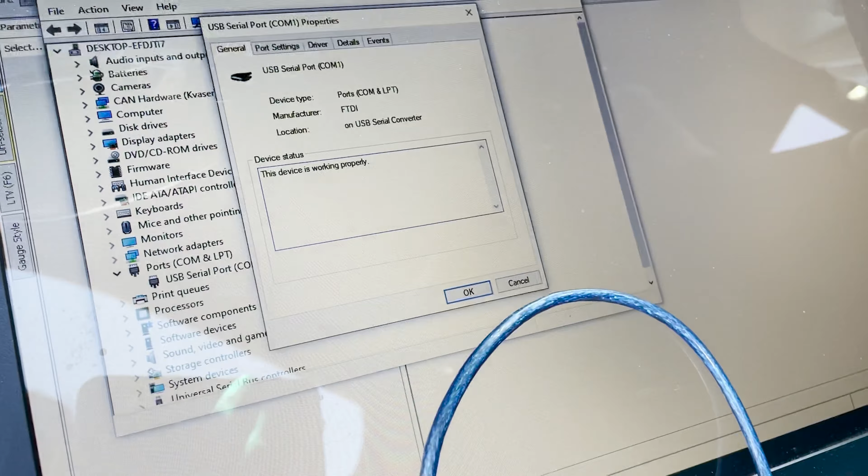First thing we're going to do is just plug the cable into the laptop, and then we're going to open up our RomRaider logger. And if you don't see this COM1 pop up, you're going to have to come into Device Manager. Go to Ports. And see where it says serial port and then the COM number. Just verify. You can come in to Properties, Port Settings, Advanced, and then you can actually change the COM port that's being used.

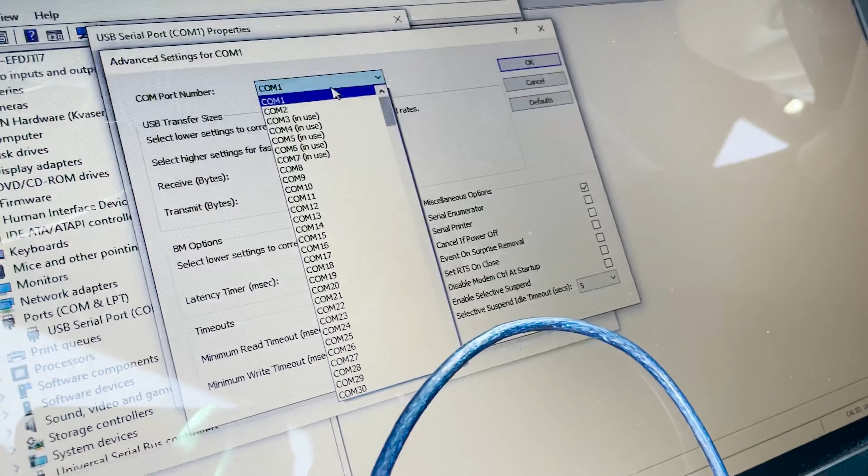So sometimes if you plug in a device and it's sharing the same COM port number, you can actually come in here and change that to a different one. So see on my computer it says in use, so just change it to a different one and then it'll become available in RomRaider.

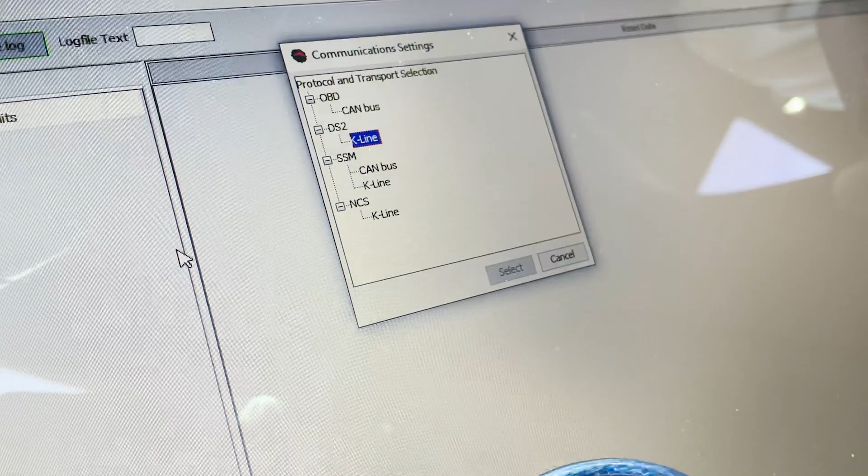Okay, the thing you need to do is come into select logging protocol options, and this you need to change to DS2 K-line. I think when you come in here, the default value is SSM K-line. I think this is for like Subarus or something. OBD won't work. It's going to be your DS2.

The other thing is, if you have a wideband sensor, you can also plug that into your USB and then choose whatever one you have, and you can also log that channel as well. Once that's plugged in, you should be getting a message like this. As soon as you turn the key on though, okay, should be getting the correct values now. So you're going to get a parameter list here, okay?

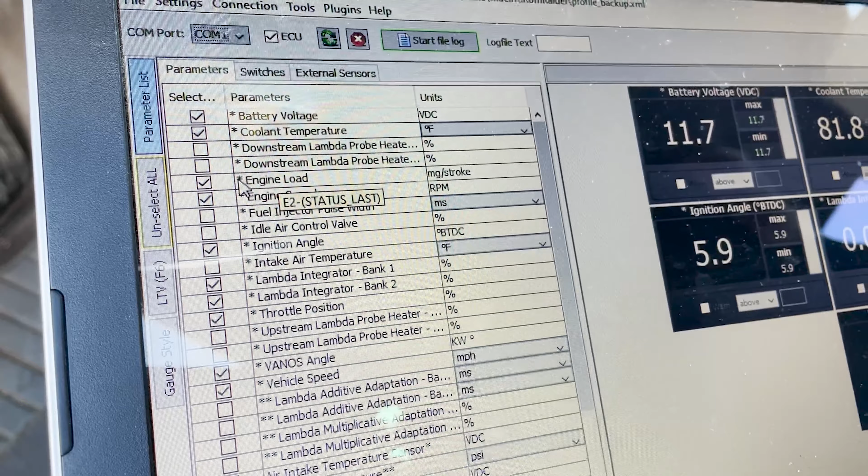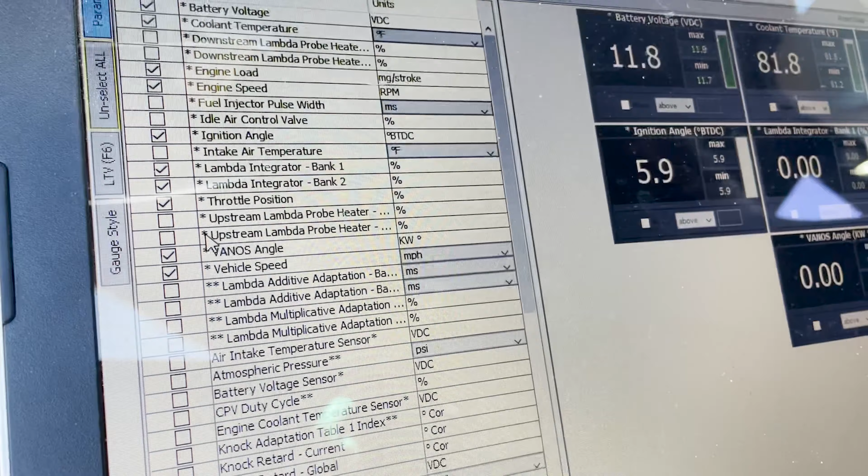So what you want to do is make sure that most of these are fairly important, okay? So all the ones with stars, the star means that it won't slow down your connection if you log these specific parameters. These are considered high-speed parameters by the ECU, so you can choose as many of these as you want. So the one thing I don't have selected here and needs to be turned on is your lambda adaptation.

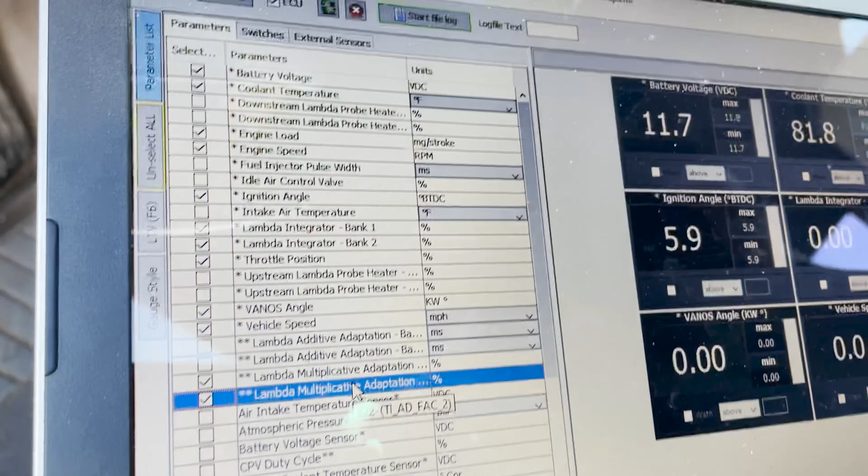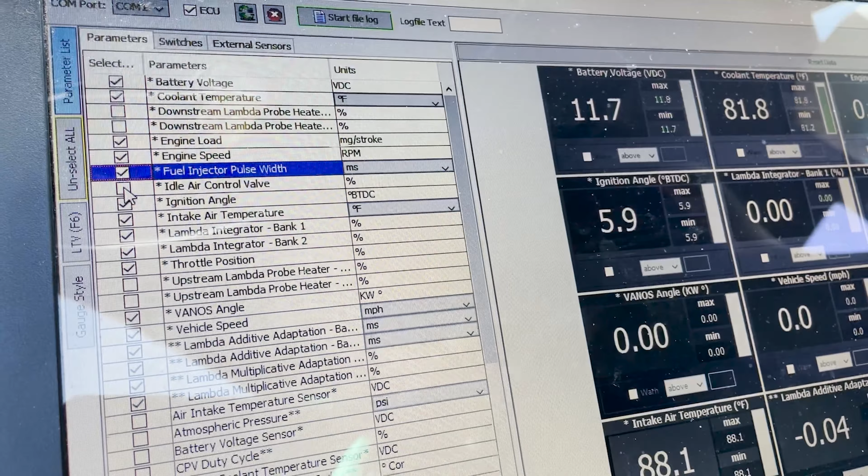So all the ones that I have checked here, and actually intake temp. I'm not sure what these heater values are for. I've never used those. Let's see, additive adaptation you want to turn on. Fuel injector pulse width is pretty important. And then if you need to mess with idle, you're gonna turn on your idle air control percent. So that's pretty much it for that.

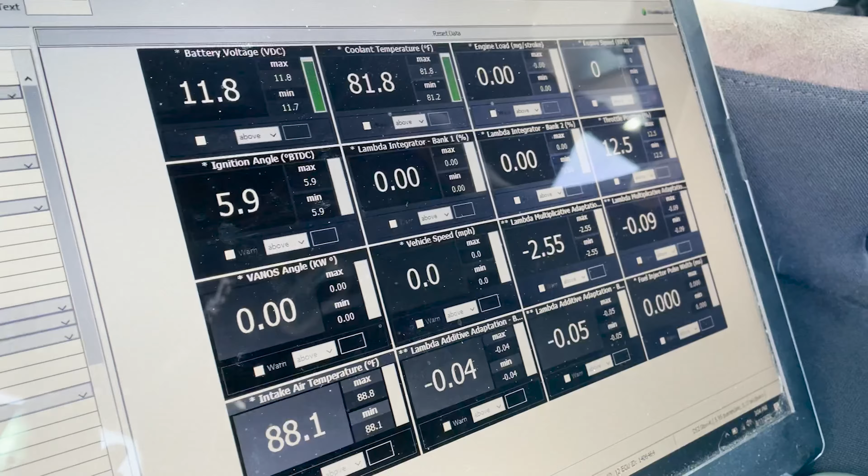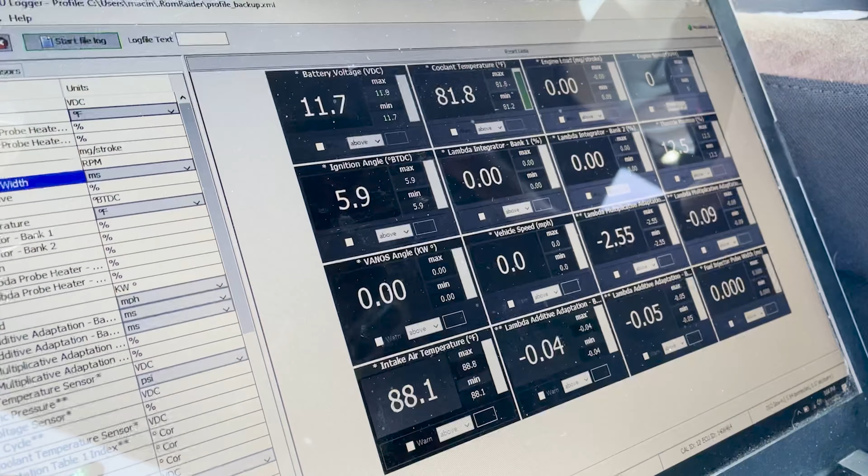We got battery voltage. So you can see here, I have the dashboard pulled up. So you can actually see all the values being logged, which is kind of cool. And especially if you're driving the car and you're logging knock and you want to visually see if you have knock, you can see that here. Okay, so once you start the car and you start driving, you're gonna say start file log, and then you can give it a name. So I'll click this.

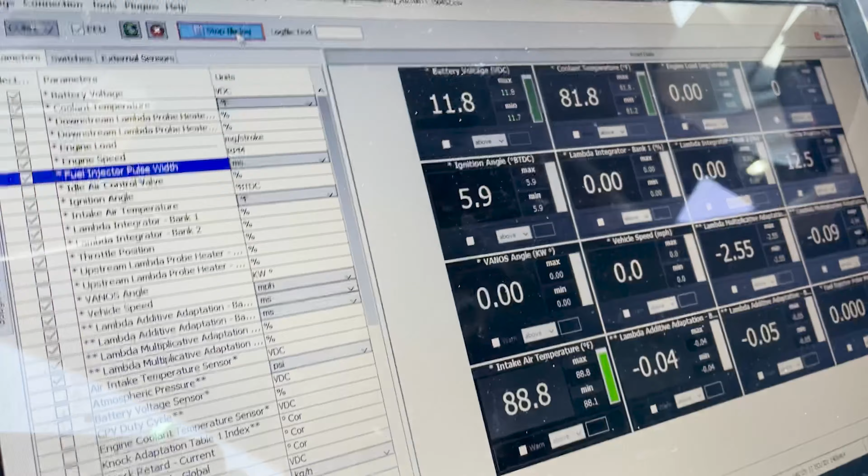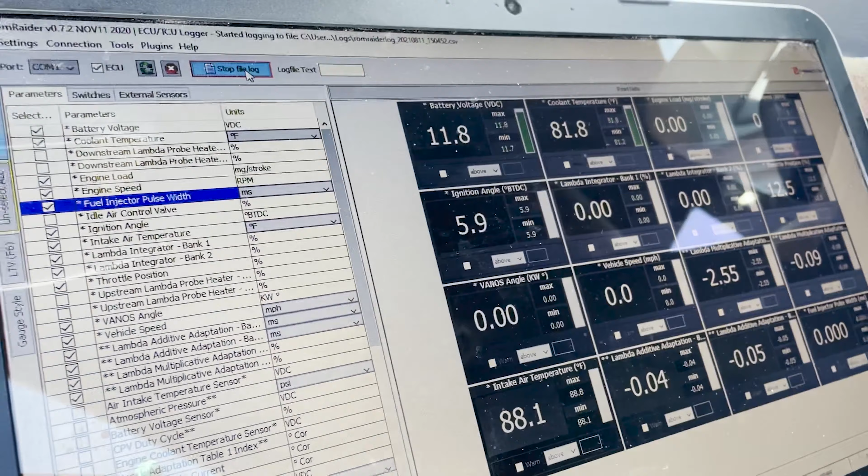Okay, you're gonna drive around. Let's say you need to mess with your idle, so you'd have it idle for a couple minutes, or you'd make some wide open third gear pulls to check fueling, or if you want to tune part throttle fueling or cruising, you would do that. And when you're all done, come in here and click save.

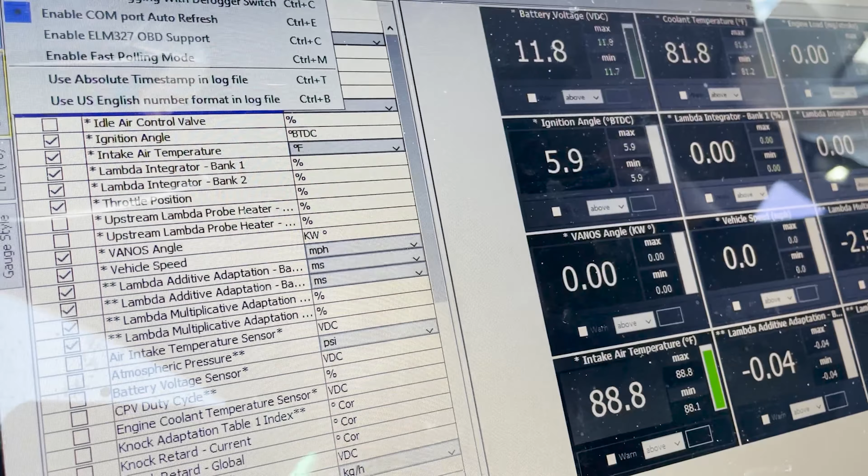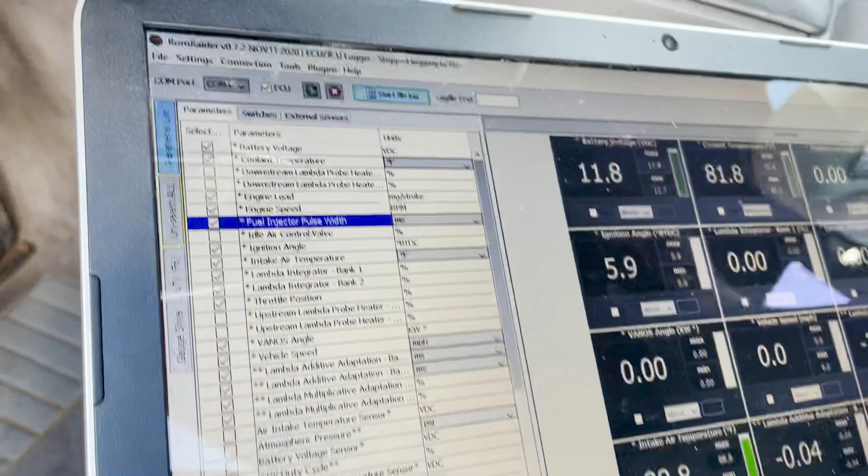Now the place that it's gonna save it is gonna be your, if you come in here, log file output location. So wherever you have that listed, it's gonna automatically save all your logs into that folder. The one thing to keep in mind here, see these tabs at the bottom? So if you're running the dashboard and you have these specific parameters being logged, they're not going to log. This is only for displaying values on the dashboard when you have dashboard selected.

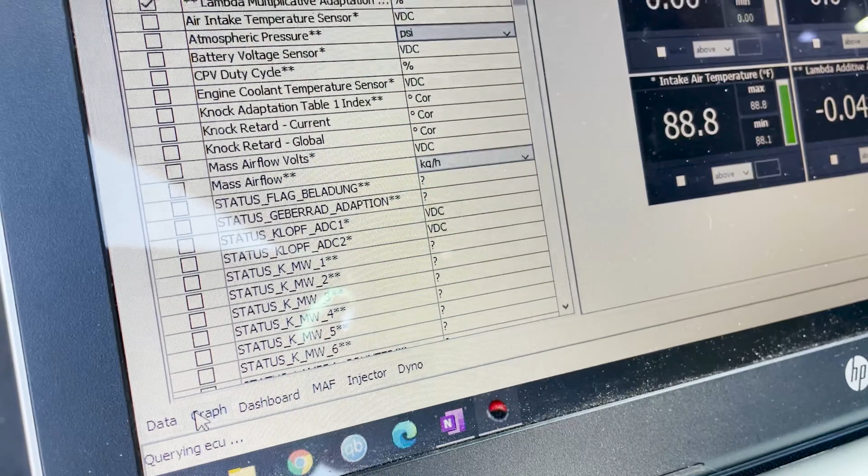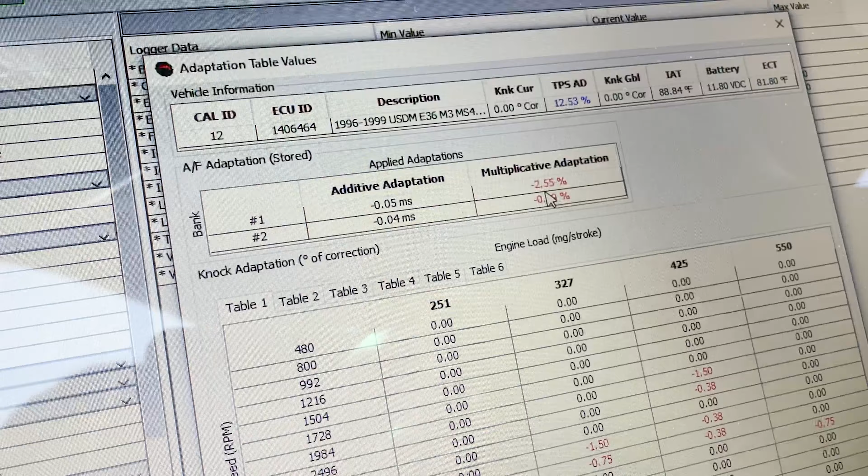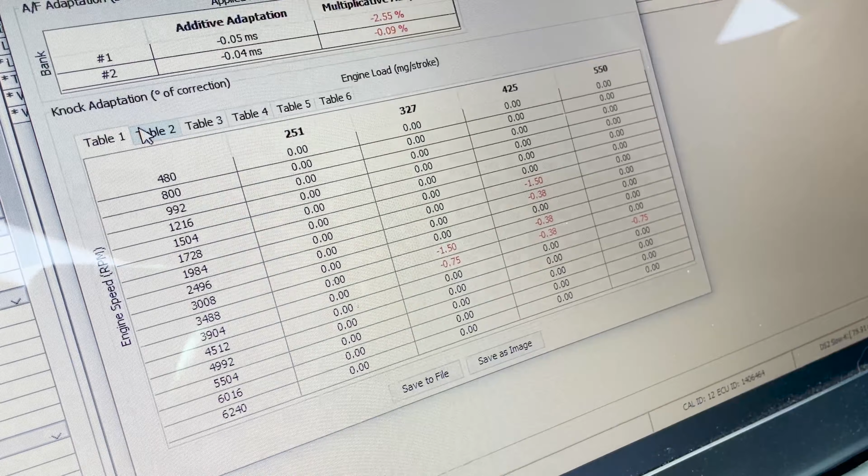This little LTV, you press F6 or click on it, and yes, it's going to interrupt the logging. But this is going to pull up your adaptation tables, okay? So you can see here that my car over time has corrected 2% fuel, taken away 2% fuel. And then here you have your knock tables. So you have load at the top, like I was talking about, versus RPM.

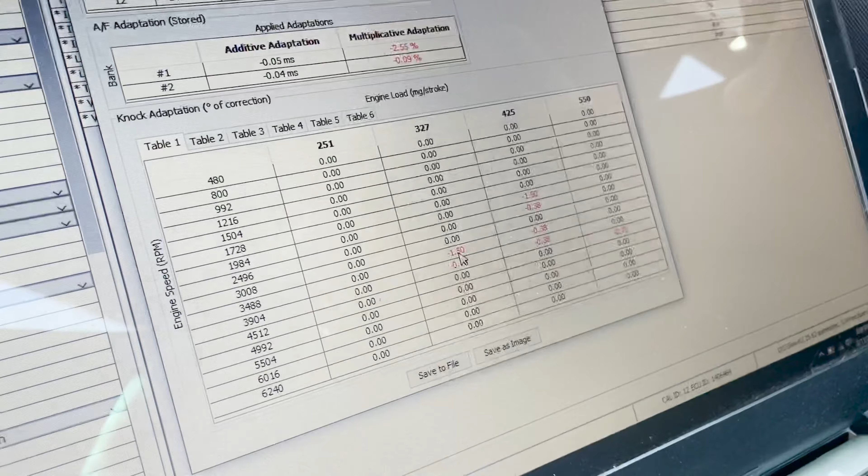And this is not gonna be a tutorial on if you change injectors, how to scale injectors. This is gonna be for basically stock injectors. If you make any changes to any way that airflow is coming in, or change of essentially engine efficiency, I guess you could say. This is almost like a VE table if you come from other platforms, essentially a more simplified version. So on the left-hand axis, you have engine RPM, and then this top axis, you have load, okay?

Now load is a calculated figure. So if you look at this here, I'm looking at the MS41 wiki page. Load is essentially a calculation of airflow coming in from the mass airflow sensor divided by engine speed times this number. And this is BMW's arbitrary engine load, okay? So this is saying how much air is coming into the motor times RPM to give you this load value. So we've seen this parameter in the RomRaider logger, and it actually matches up exactly.

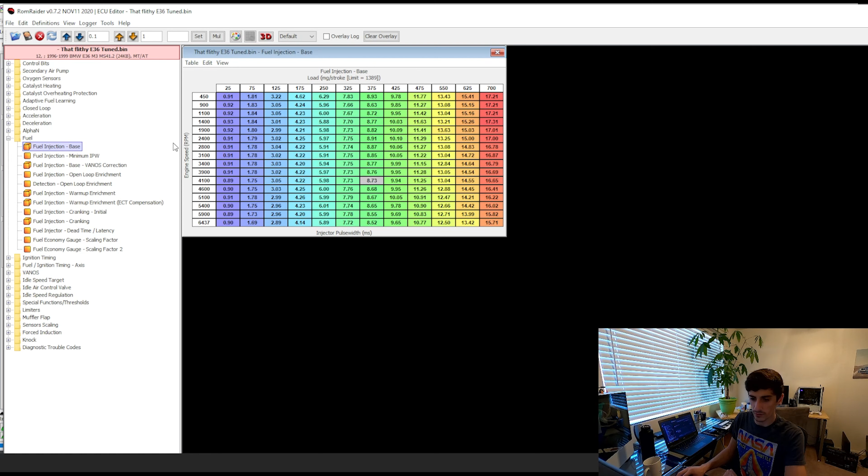So what we've logged, or should have logged, for fueling is going to be your engine load, your engine speed, and then your long-term fuel trim lambda percentages, okay? So just to reiterate, going back to our logs, we want to look at engine speed and load. We also want to take a look at injector pulse width to see if the ECU is commanding the same pulse width that we're seeing in the base map. And then we also want to see the lambda corrections that I've mentioned.

So in MegaLogViewer, I have a quick log of my girlfriend's M3 that just did a quick pull to about, let's see, about 4,000 RPM. So when you open these files up, you can start logging your different parameters here. So again, the ones we want to look at right now are engine load, engine speed, fuel injector pulse width, and then your lambda corrections.

Now, this log is a little bit inaccurate. So again, going back here, we want to actually look at this multiplication lambda, not the integrator. Integrator is your short-term corrections. We want to look at the long-term corrections.

So just ignore this log for now. This should be the multiplication values, but it's the same process, okay? So let's take, for example, this line right here we have in the log. So we have an engine speed of almost 4,000 RPM. We have engine load of 500, okay? And then we're getting an injector pulse width of 8.6 milliseconds.

So if we're going back to our actual table here, it's hitting the cell right about here. And my tune's actually different from the map that's in my girlfriend's car, a little bit different modifications. But essentially my car would be commanding 11 milliseconds and hers was commanding 8 milliseconds. So you can just do an initial check to verify that your ECU is doing what it's supposed to do first.

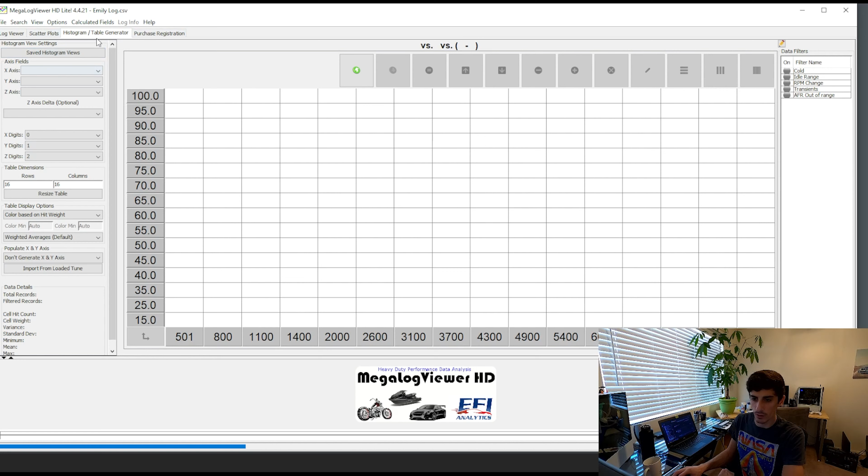I'll show you an even easier and more powerful view you can have in this to just copy and paste your corrections and not have to go cell by cell to figure out where to make these changes. Another powerful feature of MegaLogViewer is this table generator. So actually what we can do is build a like-for-like table in our log, and on your y-axis you're going to have engine RPM, same values. We're going to copy those over. On your x-axis you're going to have your load, and then your z-axis, so the actual values in the table, are going to be your actual lambda % corrections.

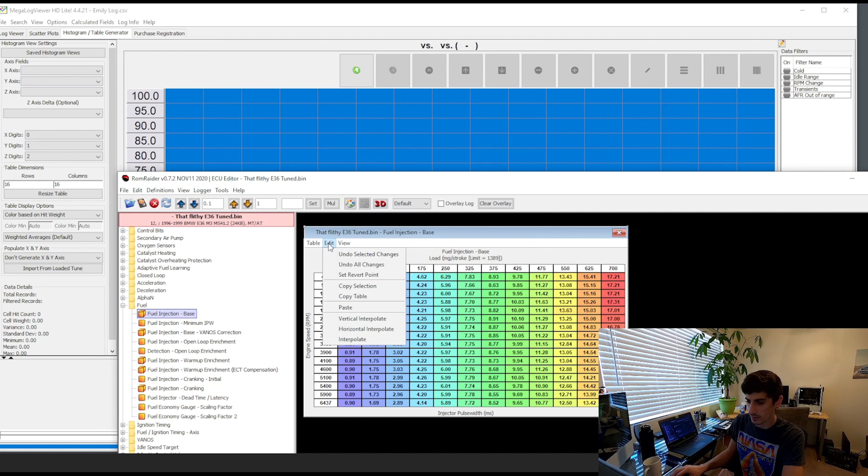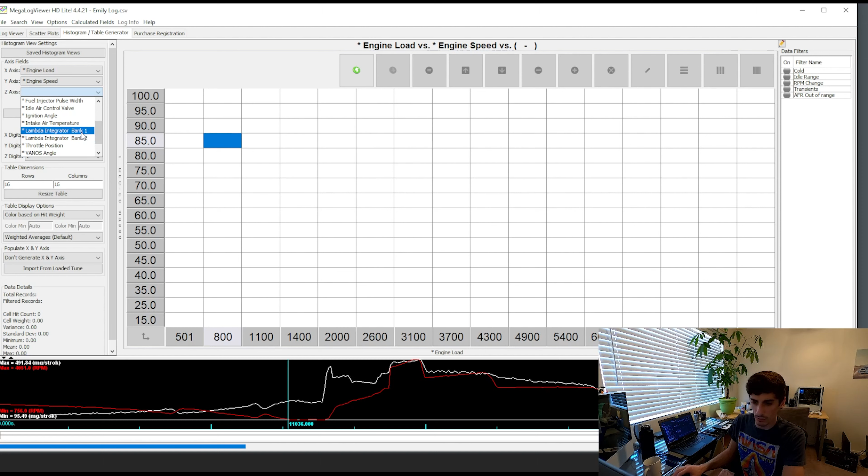So all you would do is basically copy this entire table, come here and then paste. I'm pretty sure there's a way to do paste special and then percentage. I'll have to look into that, but let me just show you this real quick, how to set up the table. Your x-axis is going to be engine load. Your y-axis is going to be engine speed or RPM. And then your z-axis is going to be your lambdas. I'm pretty sure you can log the average of bank 1 and 2. That'll probably be a more accurate number, but I guess we'll just choose bank 1 for now. And then we just have to set up our axis next.

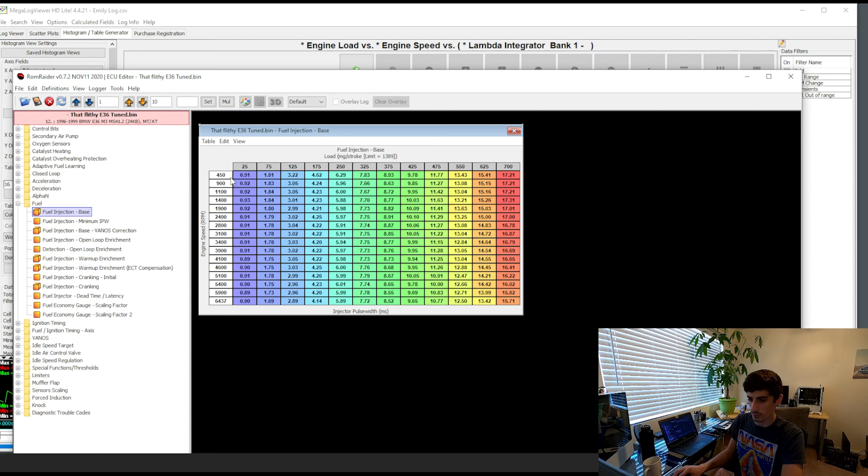Essentially, to set this up, all I did was I reset the rows and columns to match what we have in our fuel table. So 16 rows, 12 columns, exactly how we have it. Then I went ahead and changed all of the row and column axis, and I don't know if there's a way to copy this, but I did have to actually manually type these all in. So if you double click, you can change each value. So now it actually matches 1 for 1 these table column axis. So once you have this all set up, you can actually save this histogram view. So this is only a one-time setup thing.

But essentially what you get once you've logged engine load, engine speed, and your lambda is a correction factor of all of the cells that you've driven in and how much the ECU actually had to correct, minus or plus percentage-wise, to get your fueling to where it needs to be. So this is a very powerful view, and then what you can actually do with this is you can copy this whole axis over to this table, paste it in by a multiplication value, and actually correct your fuel table just based on your narrowband sensors, which is pretty cool.

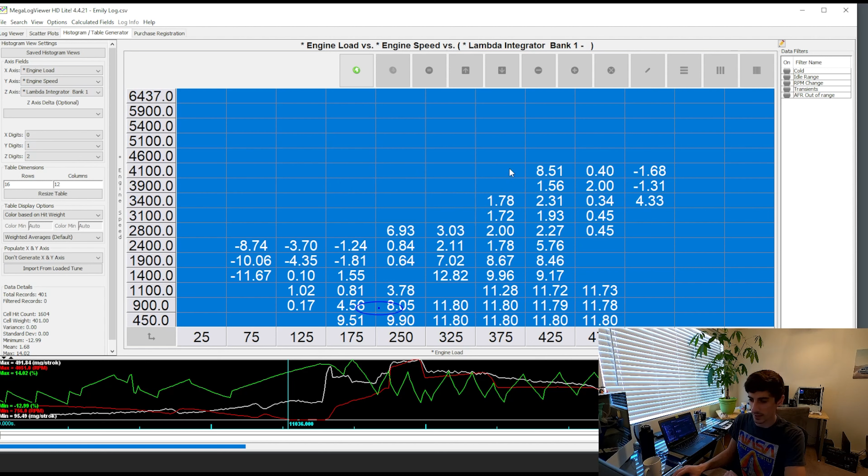I know this takes a lot more time than an actual wideband, and once you add these in, you're gonna have to do a little bit of smoothing. So there are smoothing tools in here to change these, but essentially your log is gonna tell you how much you have to correct your fuel table or how much it's off.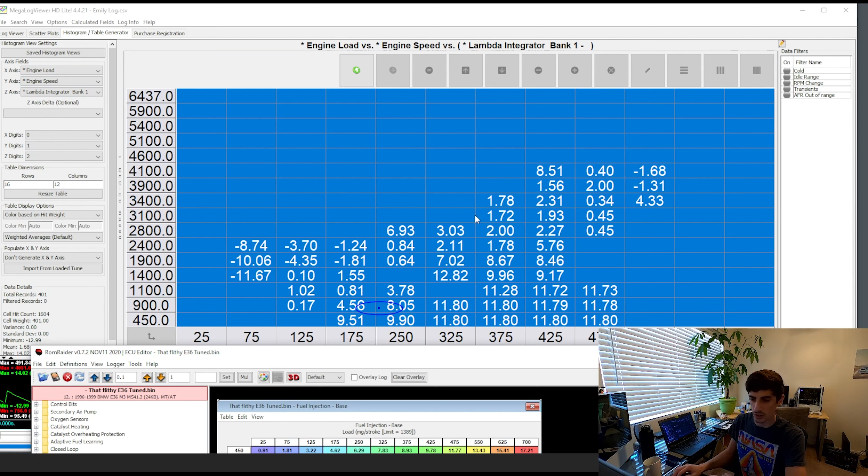So when you do make those heavy modifications, so let's say cams or intake tract or exhaust, and then you start seeing correction factors more than like 5%, you can see that, for example, here, the ECU had to add 12% fuel. The ECU here had to take away 8 to 10% fueling from what it thought it had to do based on your original base map.

Okay, so we've come to everyone's favorite part of the video, because this is actually how you make power. So after your fueling is dialed in, even if you don't make any changes and it's a stock fuel map and it's all good, you can actually make a decent amount of extra power and have a ton of drivability and responsiveness if you tune this ignition timing table. So when you order tunes from RK Tunes and all those guys, Castle Performance, the main thing they're doing is modifying this base ignition timing and VANOS too, so we'll get to that as well.

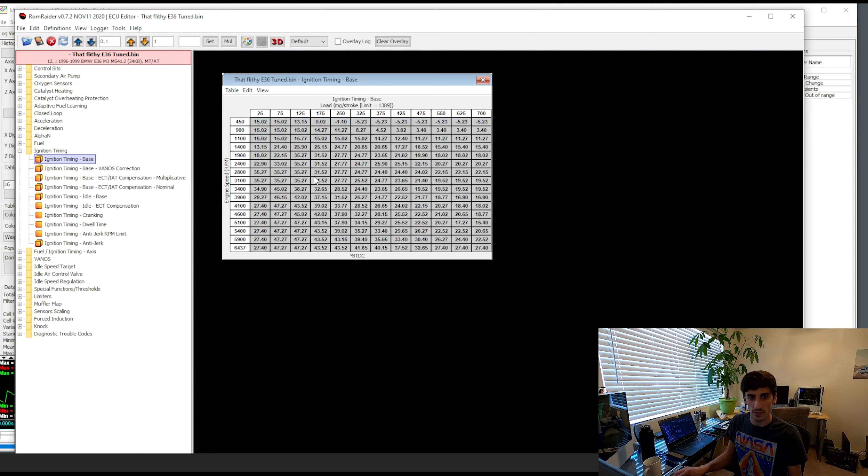So the method that I do, since I don't have a dyno and I'm street tuning, is I will keep increasing this entire table. I'll start with probably 5 degrees from just a base tune because BMW is fairly conservative with this. So across the board, I'll add like 5 degrees of timing, and I'll go and log knock. If I see knock, I'll come in and take a little bit of timing out of the cells where the knock occurred. And I'll just keep doing that, keep increasing timing. But you'll get to a point where you'll add so much timing that the motor won't like it and you'll actually start not making as much power.

So since we don't actually have a dyno, what you can do is use your load. Load is almost a good indication of how much power you're making. So not the best, not one for one, but at least you can see if load is increasing or decreasing with these timing changes. You're heading in the right direction, you're making more power. Other than using your butt dyno, you actually have physical numbers you can look at. So again, I would come in here, start off with adding 5 degrees. Again, your motor's only going to take so much, obviously, before it starts knocking, especially if you have crappy 91 octane fuel or less, depending on where you're at.

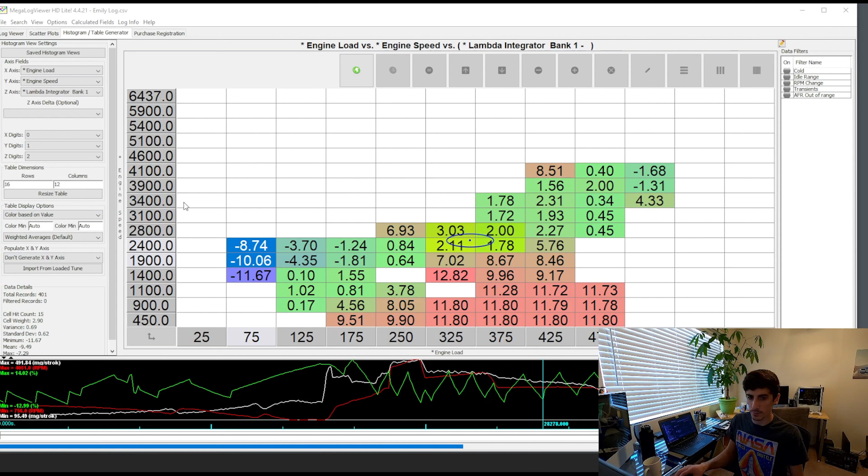So again, I'm going to come back in here and use the same powerful chart. So actually, the first thing I'm going to do here is clear this out, and clear out injector pulse width. And all I want to log here is ignition angle, knock retard current. I believe there is another ignition retard that has to do more with reducing timing if your motor is getting hot or your intake air temps are getting hot. The ECU will dial back the timing in those events, so that parameter has more to do with that. But if you want to tune and make sure your motor's safe, you're going to look at this knock retard current, okay?

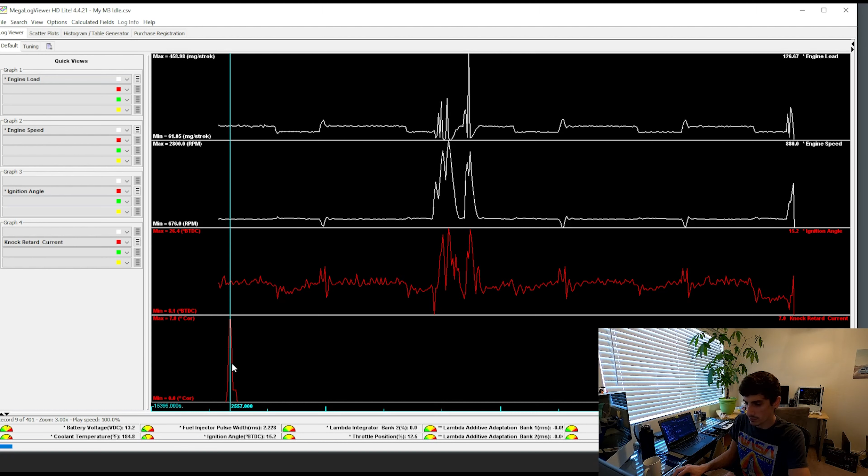So as you're going through, this is just an idle tuning graph I have here, so nothing too crazy. Obviously, there's no knock on this one. Here, I've recreated a knock event, okay? So essentially, if you did have knock occur, you would see on your knock retard current that it'll start at probably 1 or 2 degrees, work its way up to 7 to 10 degrees of knock retard, depending on your tune settings and what the DME wants to do, how severe the knock is. So you're going to look here, and you're just going to see this spike.

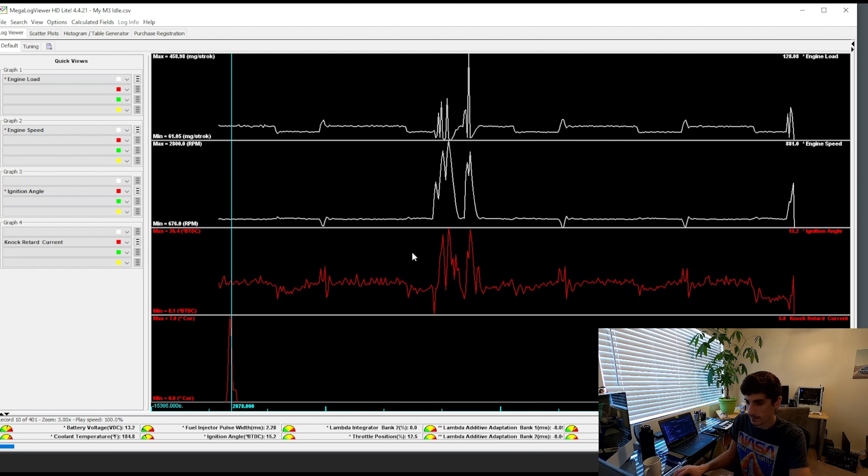The other thing you can do is come in here. Since the ignition table uses the same axes, it's pretty easy to change this to a knock occurrence table just by changing your z-axis here to knock retard current. I don't think this is showing, it may be my decimal places, but essentially you can see at 900 RPM, at this engine load, we've seen a bit of knock. So again, you would come in here for this knock event, come back into your spark table, and then at 900 RPM at this load, you would take a couple degrees of timing out in this area where you've seen the knock actually occur. I just realized for this chart, you actually have to change this in the table display options. Mine was set to weighted averages. You're going to actually set this to maximum values.

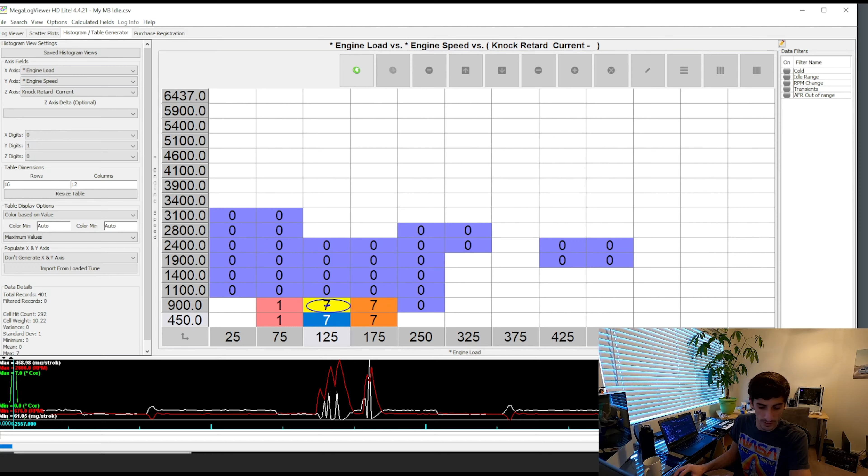So you could see here the ECU took out 7 degrees of timing in this knock event and 1 degree here. So as it ramped in and had a knock occur, again, this is where you would take that out in the same area. This is going to be quite a tedious process.

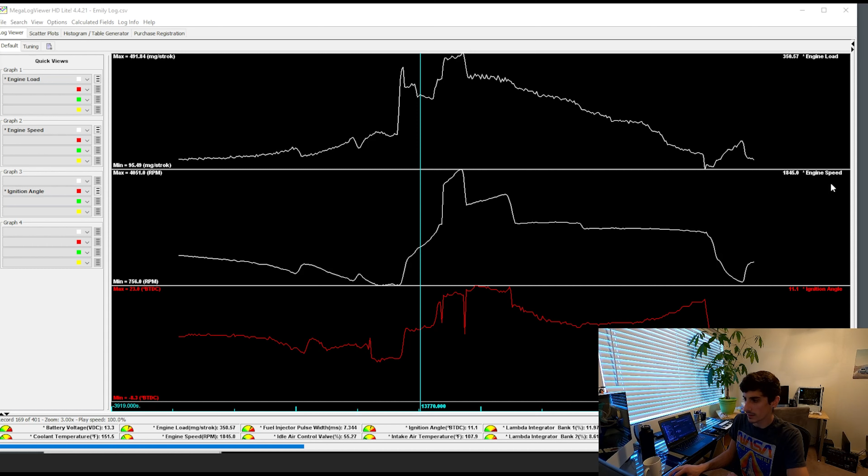As you go through and you keep adding timing in, you have a knock occur, you would go out again and drive and log the same parameters to make sure you don't have knock, and just kind of repeating the same process. Your quote-unquote dyno to actually see if you're making improvements or making things worse, because engines like that sort of sweet spot of timing, you can come in here and load engine RPM and load, and actually you can put these in the same table here.

So you would go through and do a pull, and you would basically compare back to back, and I think you can load multiple tune files into this. I haven't really worked with this too much, but I know there's other programs where you can load in multiple tune files and do comparisons. I'm sure you can do that with this. But essentially, you'd want to compare back to back if you're hitting higher load cells at the same RPM.

Now, again, you have to keep things consistent with that, because load versus engine speed isn't always indicative, because if you're going up a hill or downhill, so you'd have to have pretty flat, consistent ground and make the same pull in the same gear to really measure these things back to back. But this is your sort of pseudo street dyno, if you will, to actually see if you're making power improvements or not.

Getting into Vanos tuning, this one's a little bit interesting. It works a lot better when you have a dyno available, but I'm going to show you how to do this on a street tune. When you add in an M50 manifold, or even stock settings are fairly conservative with when it turns off the Vanos. Essentially, the general tuning process is you want to log load and RPM with Vanos disabled, and then do a wide open throttle run to the rev limiter. Same thing here. You want to do load and RPM with Vanos always enabled, and do a wide open throttle run to the rev limiter.

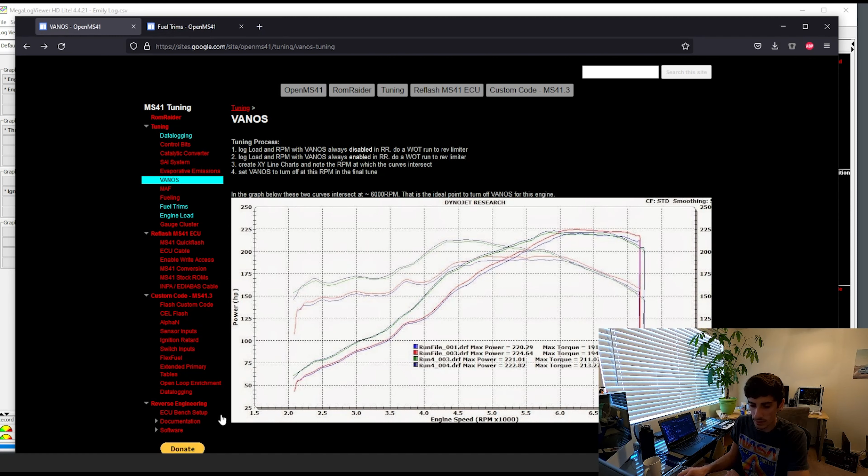I don't have the actual full version of MegaLogViewer on this PC. I have it on my tuning laptop, so I'm unable to open that second file to do the comparison run. But essentially what you're looking at is, again, that intersection between where your two loads will overlap, and that's where you want to turn off that Vanos. You would come into your actual tune here, go to Vanos, and then go to your heavy throttle on and off. So again, here is your switch point. Now this is also factoring in vehicle speed, so you're gonna want to make sure that's logged as well.

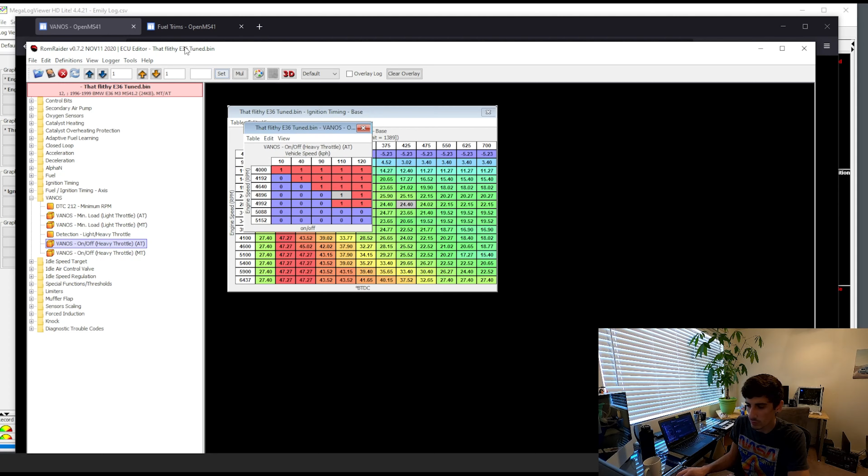I think that's gonna be it for today's video. I'm actually gonna make an additional fourth video on forced induction tuning. So that's actually going to be involving scaling the mass airflow sensor to double the limit of what the ECU can read, because the stock ECU is only a 1,000 kilogram per hour load. So you would actually double that for forced induction to get past that.

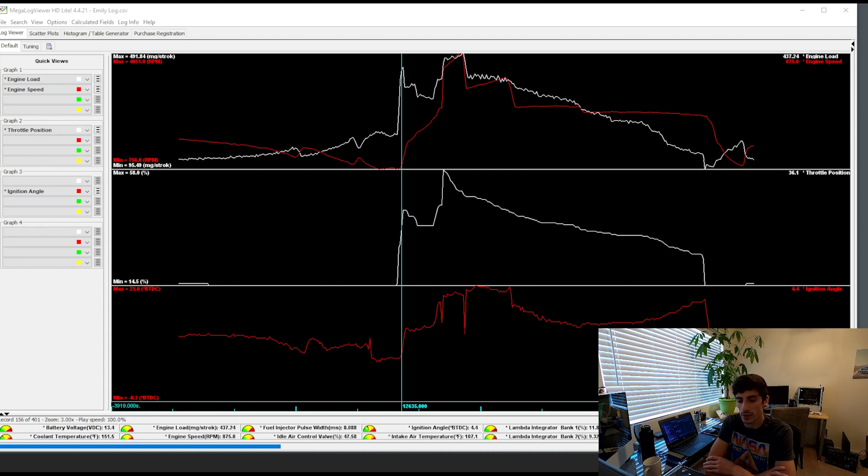We're also going to be getting into injector scaling. There's some spreadsheets to actually scale those. We're going to be getting into how to run different mass airflow sensors. So a lot of people will use the stock MAF with a resistor inline, or a Nissan slot MAF to be able to have higher limits for boosted cars. So I'll be making a video on that next. I have to do a little bit of research on a couple things, but I'm pretty confident I can make that one.